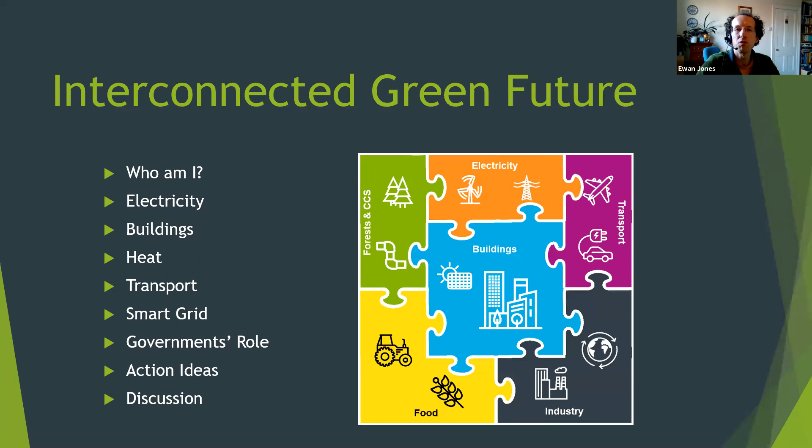As well as having a wonderful family, I'm a chartered engineer, and I work as a consultant in energy efficiency and renewable energy, particularly in buildings. And I've been doing that for almost 15 years now. A bit later, I'll explain a bit about some of the work I've done recently to help the Scottish Government develop a new version of the building regulation that limits carbon emissions from buildings.

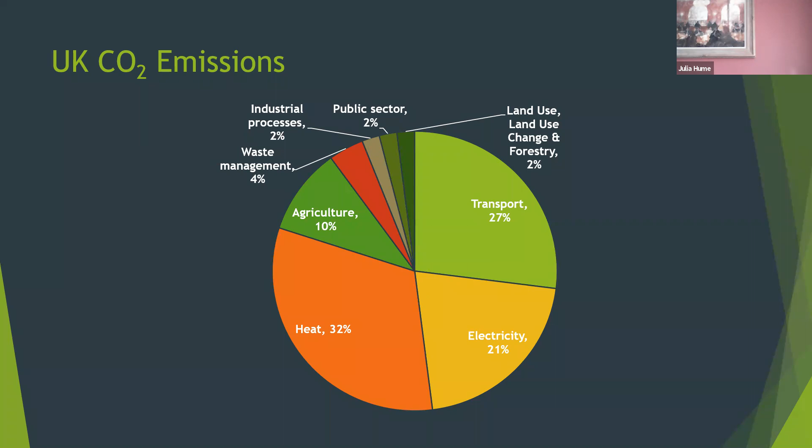So for a long time now, we've tended to think about these three areas separately. The way the government is organised and businesses organise themselves tends to reflect this too. So we've got a department for transport and regulations for electricity. There's always been a little bit of overlap, but it's generally been quite limited. So, for example, you may use electric storage heaters, so that would be an overlap between electricity and heating. And in terms of transport, we've had electric trains for a long time, but it's a relatively small part of all the transport going on in the UK.

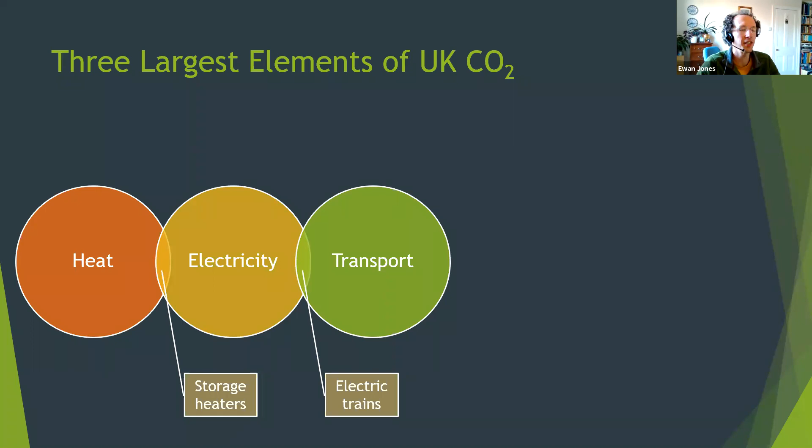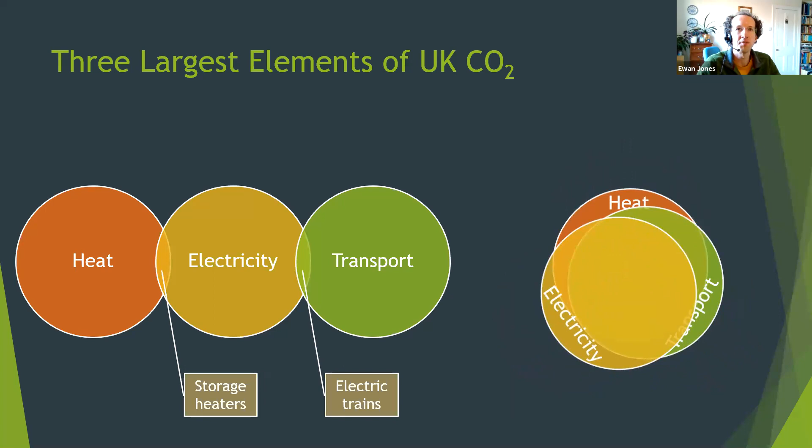But now these are becoming much more interconnected areas, and this will continue to increase as we decarbonise the economy further. So I'm going to explore some of the ways that that's happening. So we're going to look at the new ways these areas are starting to overlap more and more as we're looking at these different areas individually as well.

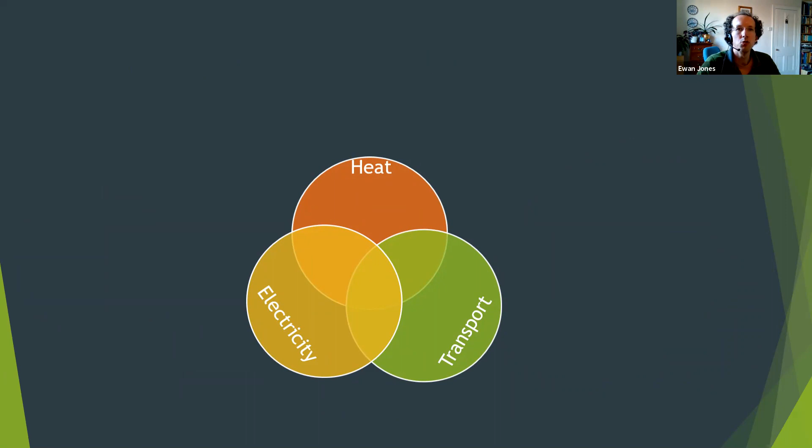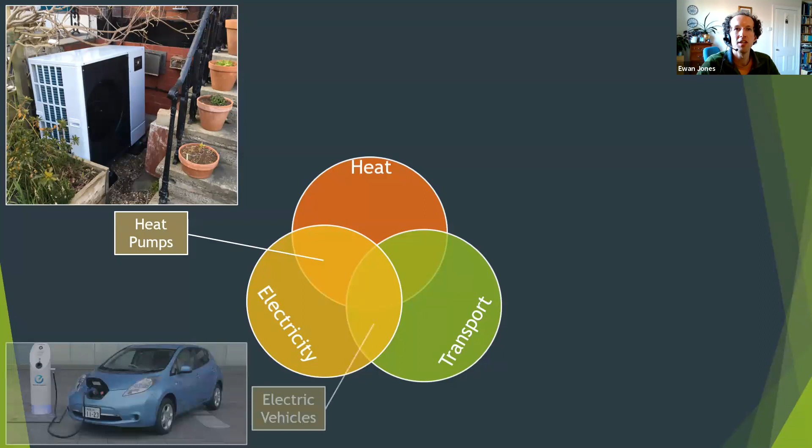So some of the new areas for overlap are things that you may have heard of or may be familiar with. So heat pumps, and I'll explain a bit more about what they are in a moment. Electric vehicles, which you may be a bit more familiar with. Hydrogen, which is getting a lot of media coverage, and then something called the smart grid, which I'll try and explain a little bit more about as well.

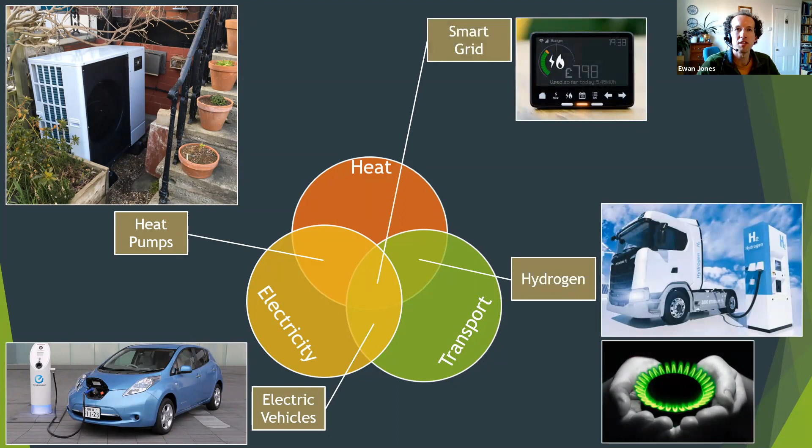If you're interested in this area and how the grid varies dynamically, I can recommend this app that you can get for a smartphone, Android or iPhone, it works. It gives you an update on what the UK grid is doing every 5 minutes, and you can look at it and see the percentage coming from different sources.

So I could give you an update right now. And it hasn't been very windy recently, so wind has been doing very little. So wind is currently doing 3% of the total, and we're getting 57 from gas. And obviously the sun's going down, so the solar's doing very little. But it can be much higher, and I've seen wind and solar between them supplying about 50% of our demand, and with other bits from nuclear and biomass. And we import and export electricity between other countries as well, which you can see here. French and Dutch interconnectors, which I'll talk about in a moment.

So this graph is taken from the app, shows how the electricity grid is managed on a typical windy day. As far as possible, the wind and solar, shown in green and yellow, are allowed to contribute all they can. We get a bit from nuclear, which is basically always on, that's shown in light brown, and a few other things. But what's making it all work at the moment is that gas, shown in the darker shade of blue, is rapidly responding to fill the varying gap between supply and demand. Without this rapid response, the system would fail because there's very little storage, so supply and demand need to be matched all the time.

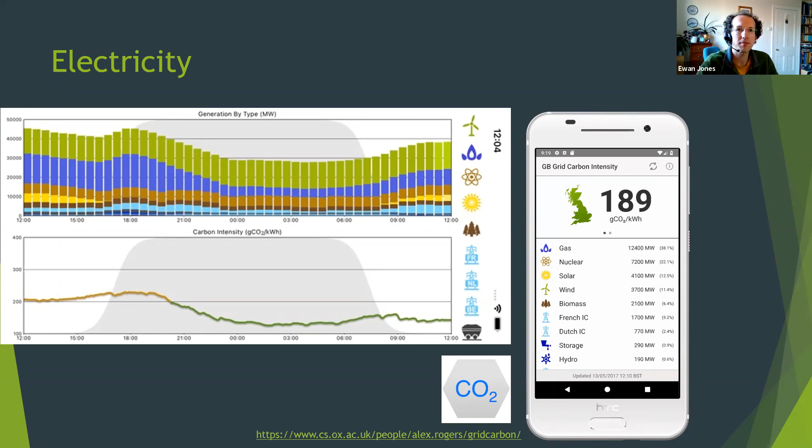Another important aspect of this is interconnectors, which link the UK electricity system to those in other countries. These allow us to import and export power to help us balance that electricity system, both here, and it helps the other countries as well. This map is slightly out of date, so the green links and most of the blue links are operational. The one labelled IFA2 down here, connecting us to France, turned on earlier this year, and the link to Norway will turn on later this year. The ones shown in purple and yellow are proposed but not built yet.

There's also some planning for a link to Iceland, but that's a particularly challenging project. It's a long way. And Iceland has a lot of very cheap renewable electricity. It's arguably the greenest grid of any country in the world. It's almost purely hydroelectric and geothermal.

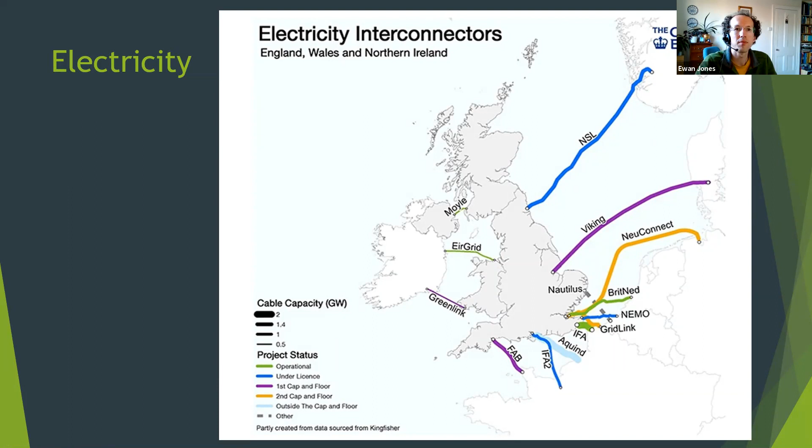So you may remember that last November there was a bit of a fanfare around a 10-point plan to decarbonise the UK. And I just wanted to read you a short section from this. The UK already generates more electricity from offshore wind than any other country. Government support to unleash the potential of this industry has seen the cost of offshore wind fall by 2/3 in the last 5 years. To offer further commitment to the industry and help further reduce costs next year, so this year, we will aim to deliver up to double the amount of renewables we procure through our next contract for difference auction, and I'll explain a bit about that in a moment.

And by 2030, we aim to produce 40 gigawatts of offshore wind, including 1 gigawatt from innovative floating offshore wind in the windiest parts of our seas. So 40 gigawatts, that's the rated output of the turbine. So it's the amount they'd output when it's really windy. Obviously, it's not windy the whole time, but 40 gigawatts is about our peak usage on a typical day. So if it's a windy day, that's saying wind alone, forget solar, forget nuclear, all the other stuff, could do everything. And they're billing that as a quadrupling of our current offshore wind capacity.

That is correct, but it's just to sort of slightly moderate that statement. If you count existing onshore wind as well, then it's more like triple, but it's still a big step change. And when you read into the detail, there isn't a huge amount of government money actually going into achieving this target. And that's because, as they said in the quote, the price of offshore wind has fallen and is continuing to fall really quickly.

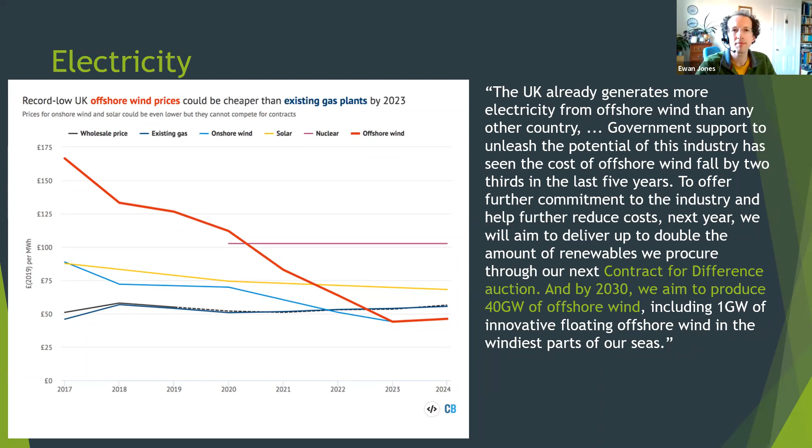So that's electricity. Let's move on to buildings. This pie chart shows the typical breakdown of the carbon emissions from using energy, normally in the form of gas and electricity, in our house. There are other building types, obviously, shops, offices, schools, hospitals, and they'll all have a different breakdown. And actually, each house will be different because the people living in each house have different behavior patterns, and the fabric of the building and the heating system will all be different.

But if we're each able to work out our own versions of this pie chart, it would show something fairly similar. And what you can see here is that in most cases, the heat for heating and hot water is likely to be a big part of the total. One of the reasons here is that, as I've explained a moment ago, electricity is getting greener. So the carbon emissions from our electricity are becoming a smaller part of the pie chart. Even if we're using the same amount of energy, it's less carbon, and this chart is showing carbon rather than energy. In essence, the UK is a fair way along the path to a low or zero carbon electricity supply, but decarbonising heat is a very different challenge.

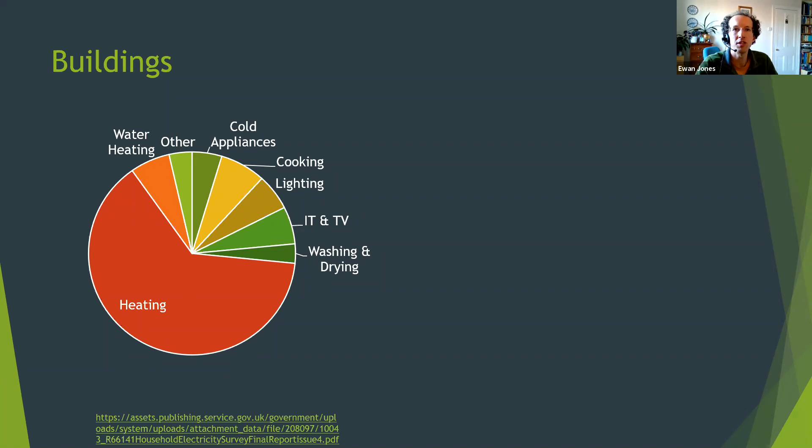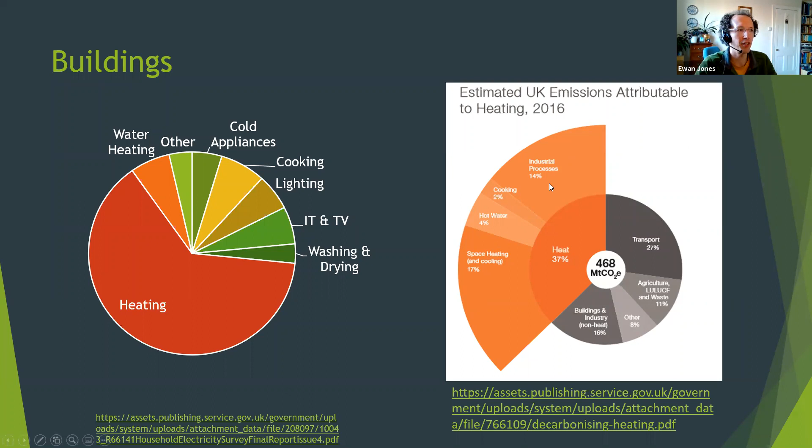The UK government, or different governments in the UK, I should say, are putting a lot of effort into decarbonising heat, not just in our homes, but in all the other places that we use it as well, including industry, which often needs very high temperatures. This chart's from a fairly recent government report, and it's showing that at a national level, if you take all kinds of heat, and they're including cooling there, so thermal energy, it's over a third of the nation's carbon emissions. A big chunk of that is industrial heat that's often requiring very high temperatures, which I'll touch on a bit later.

So one of the tools that I mentioned earlier that's going to play a big part in decarbonising heat is something that you may have heard of called a heat pump. And there are lots of types of these, but I thought I'd give a really simple explanation of how they work.

Firstly, just to remind us how a gas or oil or LPG boiler works, we take the fuel, we burn it, a small amount of the heat goes up the chimney or the flue as warm gases, but most of it, perhaps 90%, is used to heat water, which we use for heating or washing. And I've shown some simple maths here. 1 unit of fuel goes in, 0.1 escapes, and we end up with 0.9 units of useful heat.

Heat pumps generally run on electricity, but rather than letting the heat escape into the outside air, they can absorb heat from the air. So they take air and they cool it down and then reject that cooler air. Typically, they can absorb a lot of heat from this air. So we end up with perhaps 3 times the amount of heat coming out of the unit compared to the electricity that we put in. It sounds a bit like magic, but as an engineer, I can assure you it's not. I can explain how it does it if you're interested, but it would take a bit too long to go into that right now.

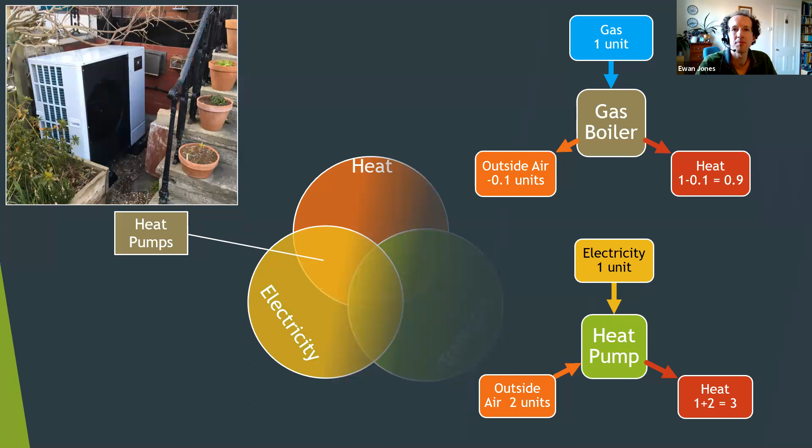Another tool to help us decarbonize heat is something called district heating. This isn't a new idea. It used to be quite widely used in the UK until around the 60s, when we found a lot of cheap gas in the North Sea. And it is still widely used in Scandinavia and lots of other countries. The idea is that rather than having a boiler in each building, we have a big central source of heat, and we use it to supply hot water through a network of insulated pipes buried in the street.

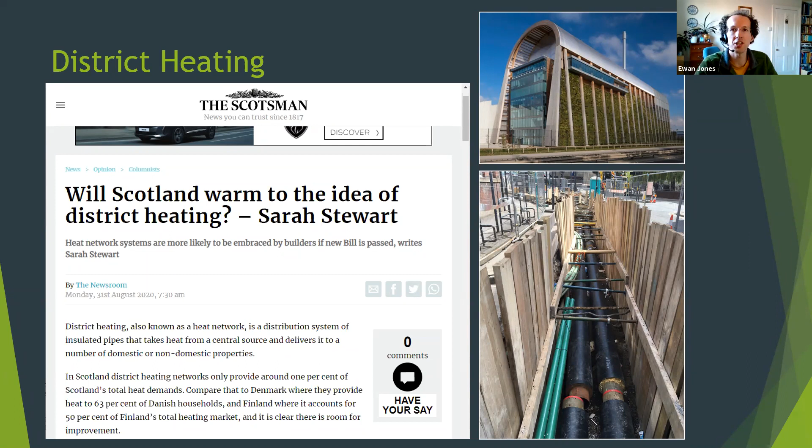Over some of the last year or so, I've been doing a piece of work for the Scottish Government to help develop their plans for changes to the building regulations, which relate to energy and carbon. I've been part of the team doing this for Scotland, for England, Wales, and Northern Ireland. And whilst there are differences between the approaches, there's a lot of similarities too, and the different UK administrations share a lot of resources and information to save them all time and money, so they don't do the same analysis twice.

The process that this goes through is that we develop proposals, which are then published in a consultation document, and anyone interested can then respond to the consultation by answering a series of questions or just responding with whatever response they want to give as well. These responses are then reviewed, and the proposed changes may be then refined to account for the feedback if there's a lot of evidence that says this change might not quite work in the way you've planned, or it's going to have this unintended consequence. The final version is then published, and about 6 months later it will come into force so that everyone knows what's coming.

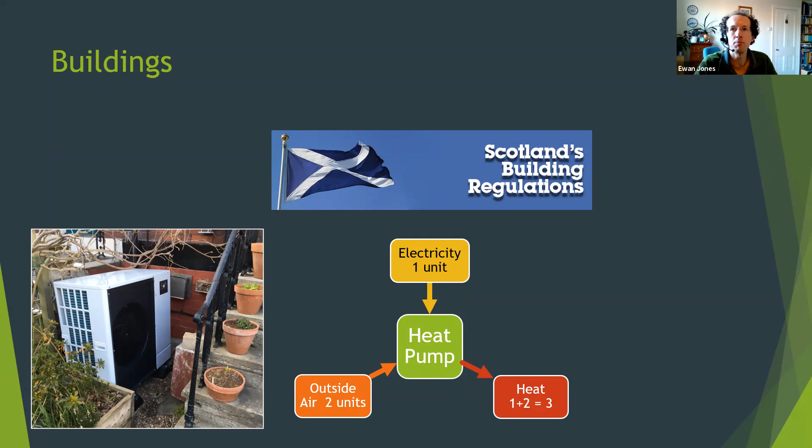In Scotland, there's a plan for a similar requirement for rented properties, but the legislation was postponed last year because of the pandemic. That applies at the moment to rentals, but there's proposals that it should also apply to when properties are being bought and sold as well, and perhaps even being linked to mortgages. And these are ideas that are being explored now. There's a lot of ways that could go wrong, but the idea is there, and that's the direction of travel, at least.

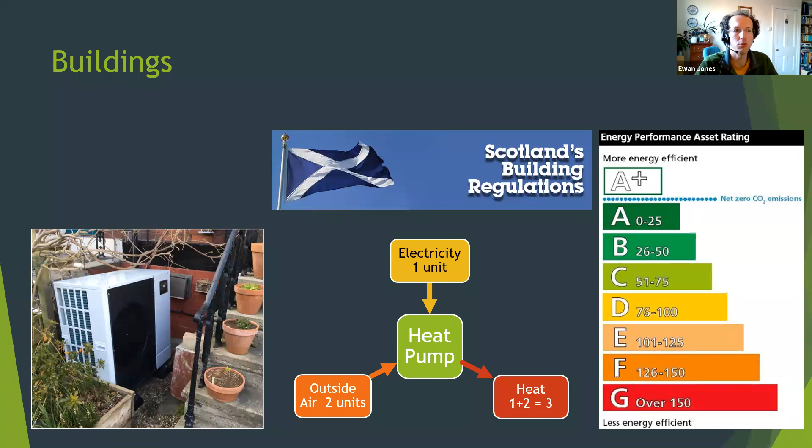So another way to decarbonize heat that is getting a lot of publicity is hydrogen. So I'll explain where this might or might not fit into the picture. The first thing to say here is that hydrogen isn't a source of renewable energy. It's simply a way to store and to transport it. Hydrogen is a gas that can be burnt like the gas that we get piped to our homes, but when it's burnt, it only releases water vapor, not CO2. But the cheapest way to make hydrogen does produce CO2, and all the ways to make it use energy as well, which we may be getting from fossil fuels as well.

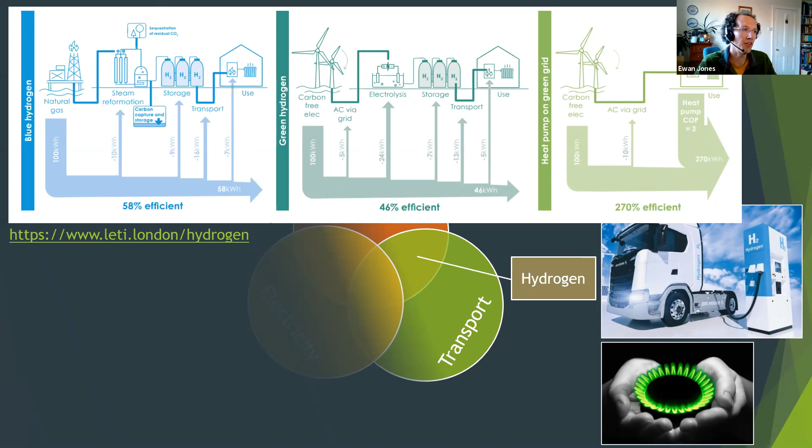It might be useful for some forms of transport, lorries, ships, and planes perhaps, although we don't yet know if electric batteries will be better for those. The technology is still developing. And there's a challenge in delivering the quantity of energy we need for heating through the electricity grid, and this use of hydrogen would help with that as well.

The last of the three circles that we're going to cover is transport. And there are lots of aspects to reducing our emissions from transport. I remember attending one of these sessions a few weeks ago where you were talking about walking and cycling more and using buses and trains instead of cars when we can. I'm not going to talk about these today. I'm not going to say much about transport because I don't know that much about it really. But what I do want to explain is how transport is increasingly linked to electricity and to buildings.

I expect you're all familiar with the concept of an electric vehicle. In many ways, the technology is not complicated. It's simply replacing a fuel tank and an internal combustion engine with a battery and an electric motor. The price of electric cars is falling, and for new cars, it's getting close to matching the cost of a fossil-fueled car. And this fall in price is being accelerated by government policies to phase out combustion engines.

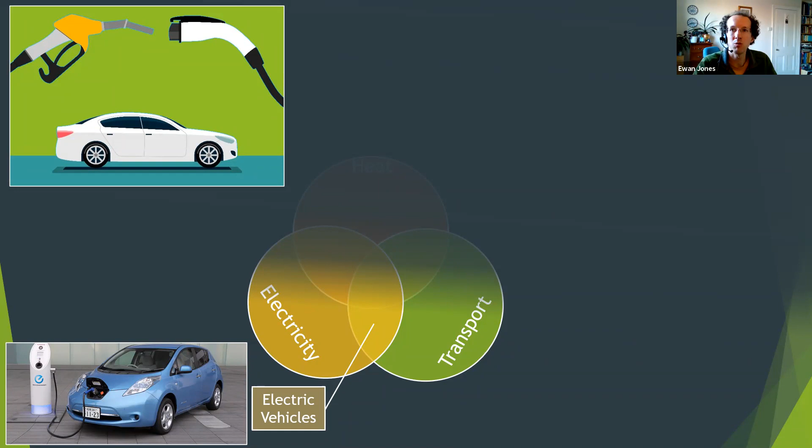I and a few others here could talk about the details of this for longer than we have this evening, but there's one particular opportunity that electric vehicles create that I want to explain. And that's the idea of something called vehicle to grid, or V2G. This is the idea that as well as charging your car's battery from the grid, in the future, there'll be the opportunity to sell some of the electricity stored in the battery back to the electricity company at times when there's high demand and when the price is high, which happens at the same time. I'll explain a little bit more about that later.

The technology for this is ready to be used, although it is quite expensive, so the charging points cost a lot more. Government and industry are in the process of working out how to change the laws and to create contracts that allow this idea to develop and to flourish. There are some companies with large vehicle fleets which are testing this out, and there are a few residential demonstration schemes in operation already. So it's coming, but it's not there yet.

But it's a way to store electricity. If we bought all the batteries for the cars anyway, as a country, can we use them to help balance the grid in solving some of the problems that we were talking about a moment ago?

So we've covered a lot of different topics there to explore how they're increasingly interdependent. So almost finally, the idea where all of these different areas combine is something called smart grid. Smart grid is a bit of a buzzword, but that's mostly because the term's getting misused in some areas. It is a genuine thing with some real value.

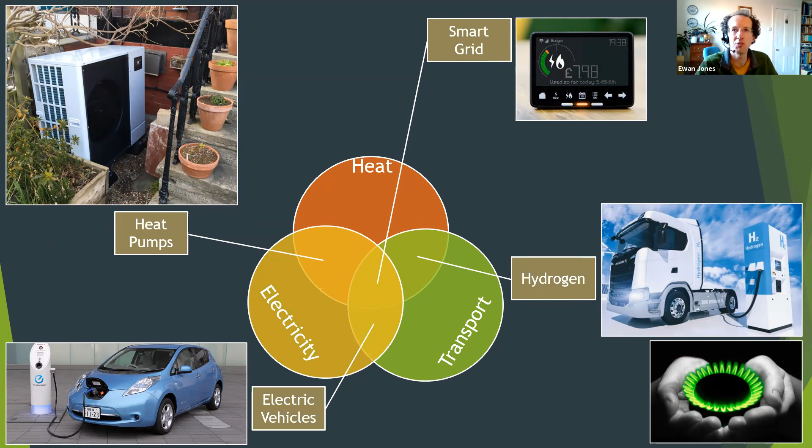So many of you may already have a smart meter with a display like this one, and you may have seen adverts which say that by getting one you're going to save energy. In one sense, they don't save energy. All they do is tell you how much you're using. But if you choose to do things to reduce that, or if it gives you information that modifies your behavior, then it can help to reduce energy demand in that way. But that, in my mind, is not really the big achievement that they can deliver.

They're also a key tool in helping to balance the supply and demand of electricity. Smart meters take frequent measurements, meter readings essentially, which means that the information can be used to help us figure out what's using electricity. But it also allows some electricity companies to offer tariffs that change several times during the day in response to what the wholesale minute by minute electricity market is doing.

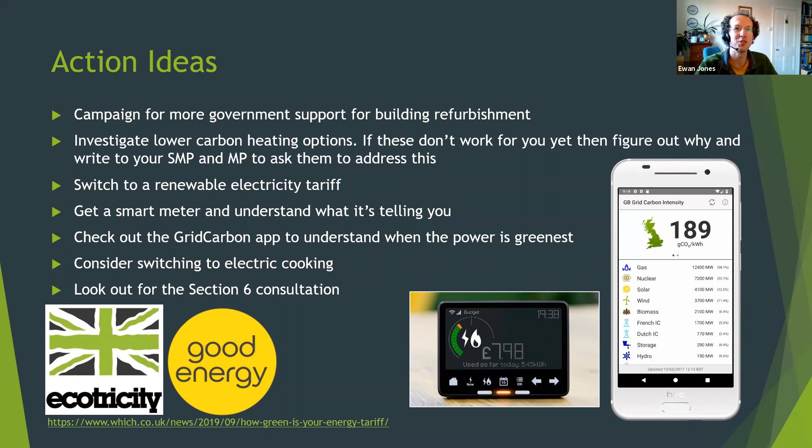Even if you don't have a strong argument based on experience, your opinion still counts. It's a democratic process. So yeah, that's all that I prepared to say. And gosh, 45 minutes, well over the target 20, but I hope it's all been helpful.